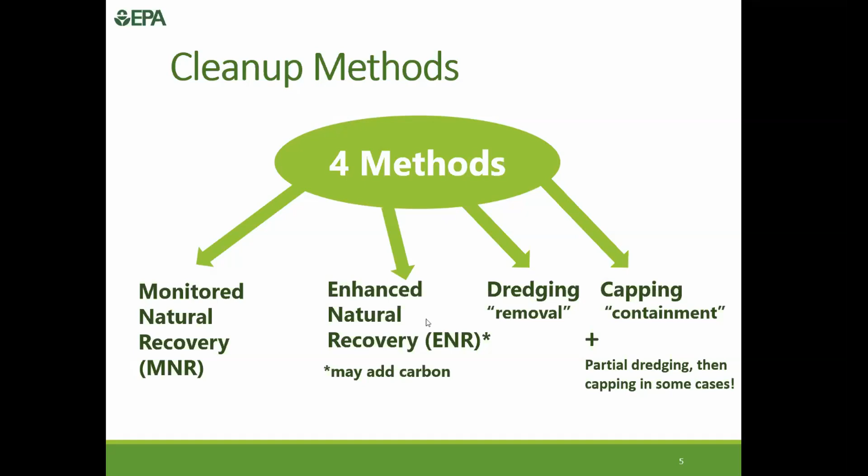So that's what you already knew from earlier slideshows, but there's more in the cleanup plan to understand, like how do you know when to use enhanced natural recovery versus when capping or dredging and capping is required. There are lots of factors that affect this decision, and today we'll go over them.

There's something called the upper limits for enhanced natural recovery—where do they apply, what do they mean? There are remedial action levels, including for benthic organisms, and I want to talk about biological testing and how that fits in. Along the way we'll compare sample results to Table 28 remedial action levels and upper limit enhanced natural recovery limits, and practice with some of the flow charts in the ROD. We'll touch on elements of the cleanup plan that aren't just technical, and at the end look at examples of a completed design. This isn't part of the cleanup plan—it's bonus information, lucky you.

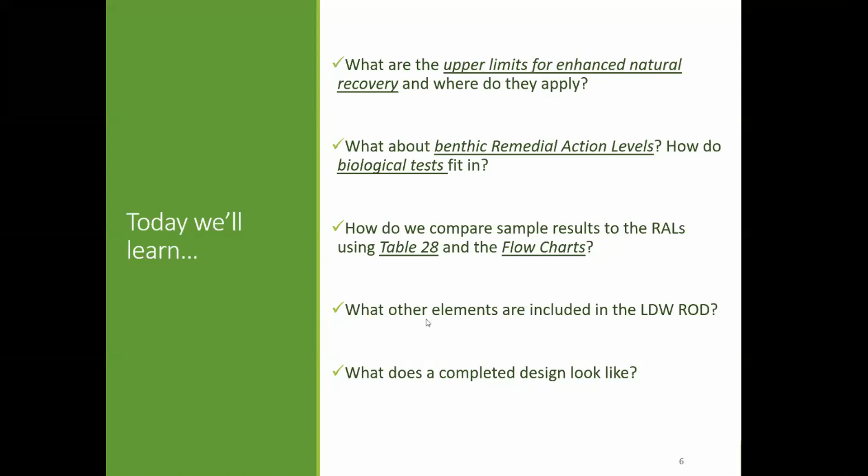So the selected remedy is what we call Chapter 13 of the ROD. It's called the selected remedy because after considering public comments, EPA chooses how to fix, remedy, or remediate the problem. This part of the cleanup plan explains exactly what actions EPA has decided are necessary to meet the long-term goals to protect human health and the environment.

Here are a few key elements. There's a narrative description of the cleanup plan in words, with tables and flow charts that provide action levels and explain what cleanup method will be used. That's the focus of most of today's slides.

It considers the whole waterway, including areas already cleaned up, the navigation channel, early action areas, and habitat restoration areas. Everything needs to fit together with the active uses of the waterway and the function of the river.

It also notes that waterway activities can be restricted in some areas to protect caps, where caps are used. If that's not possible, if we can't protect the cap, it requires dredging or other action.

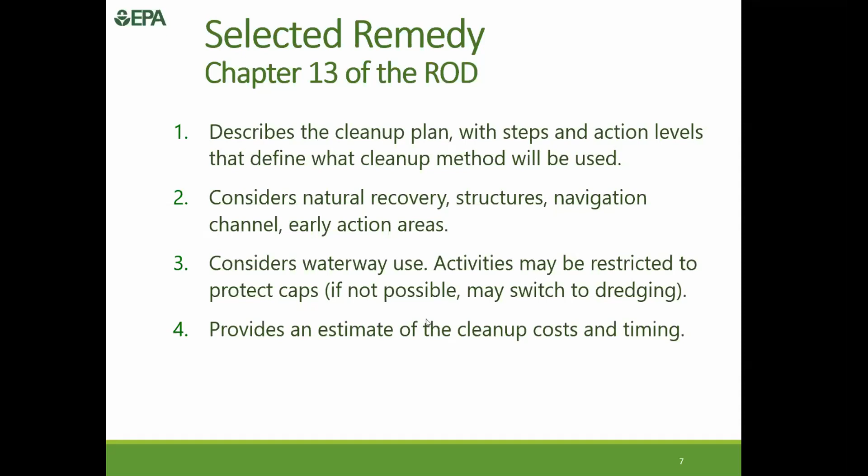Again, the ROD isn't just what cleanup has to happen where, but also a little about how, because we still want to meet the cleanup levels, the long-term goals, after active cleanup. So the plan calls for monitoring to track the progress of natural recovery across the waterway, especially in the natural recovery areas, for at least 10 years after active cleanup, to show the condition of the sediment and changes in seafood contamination levels.

The ROD also recognizes environmental justice concerns. You may have heard this term—the Lower Duwamish Waterway Superfund site affects communities already impacted by air pollution, noise pollution, and other conditions. People who fish in the Duwamish include members of communities with economic, language, or other barriers. We want to ensure communities understand and have meaningful input in the cleanup process. That's why we created the roundtable, and why we're working with community health advocates on institutional controls. For seafood, we are committed to appropriate and effective ways to give people options for eating safer seafood.

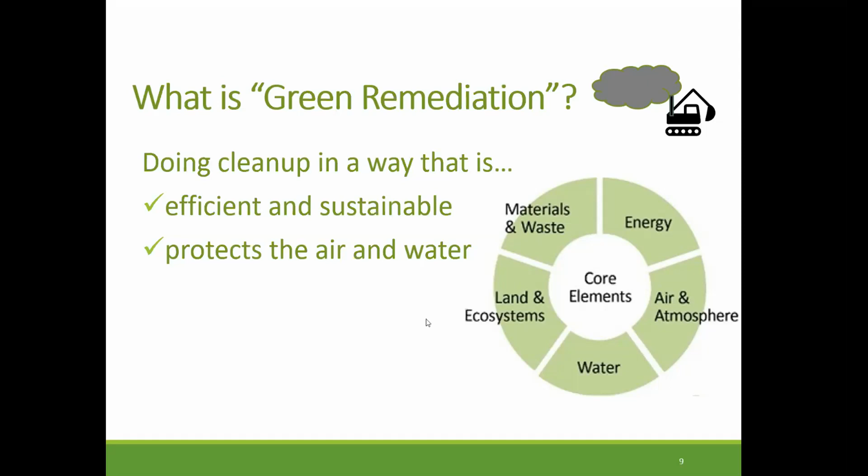But you can't clean up a spot. So how do you define areas that need active cleanup? What areas should we leave alone so that after active cleanup, natural recovery will finish the job and help us meet the cleanup levels for the whole site? The remedial action levels help us focus active cleanup areas. Next slide.

In other areas, dredging, enhanced natural recovery, and capping, these areas are approximate. The samples or individual data used to make figure 18 are in some cases over 10 years old. And this is an active waterway. Conditions have probably changed in some areas thanks to the cleanups that were completed, shown in gray, the natural recovery process, and ongoing control of pollution sources.

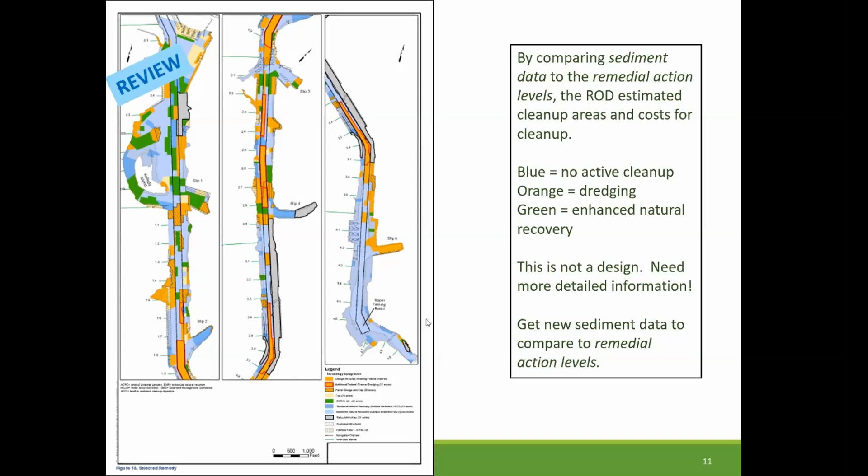The next section is the hardest and longest part. Stay with me. It will all make sense at the end. Next slide.

Last time we looked at this table, table 28 of the record of decision. This is actually just half of table 28. We touched on it in webinar 2, and it's really complicated. But if you understand it, it tells a clear story.

On the top row, see the top green arrow. This says intertidal sediments. The other half is for subtidal sediments. Remember that intertidal sediments are underwater at high tide, but above water when the tide is out. Subtidal is always underwater. We'll focus for now on the intertidal part of the table.

As we learned before, it shows the remedial action levels. We see the white rows that have the yellow boxes that say RAL. Yes, we call them RAL. For each of the contaminants of concern, next to the arrow that says, is active cleanup necessary? So you know by now that if you're above the RAL, active cleanup is necessary.

The upper 4 rows in white are the RALs for contaminants of concern for human health. And the lower 1 row is for benthic organisms and protection of them. I'll talk more about them in a minute. But remember, the RALs in the rows tell us what level of contaminant requires active cleanup. And the columns tell us in what areas or mud depths.

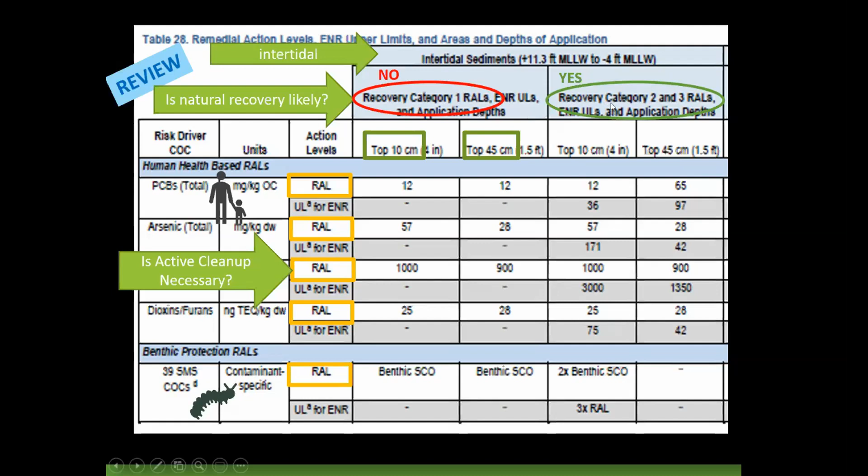So let's look at an example. Let's say you go out and you collect a jar of mud from the beach. It's intertidal, and you take it to the lab, and the lab gives you this table, and the table says there are 20 parts per whatever, we'll say parts per billion, but I'm ignoring units here. 20 parts per something, ppb.

So you take that 20 and you look at table 28, and the remedial action level is 12 in this case, because you know how deep your sample is, where you collected it. 20 is greater than 12. Action is needed. This part was easy. You already knew that. And you then can mark that location as part of the possible cleanup area.

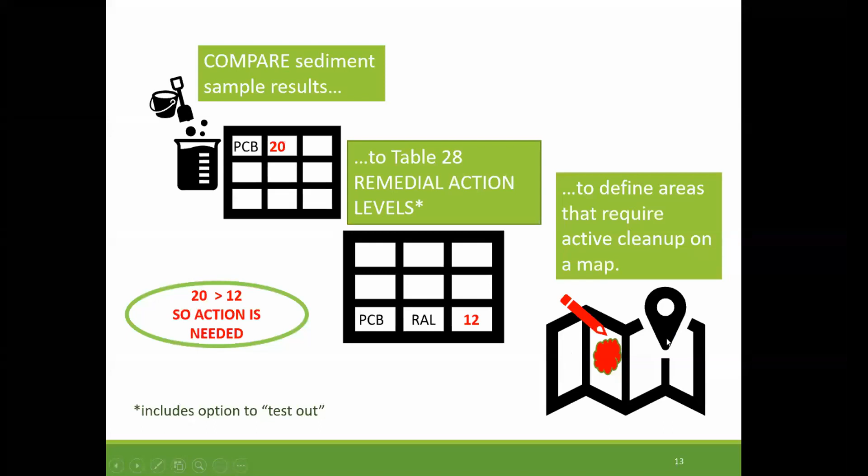Looking at this table once more, PCBs, remedial action level, 12. Check. In this case, it doesn't make a difference if you're under the red oval or the green oval. And it mostly doesn't make a difference if you're looking at 10 centimeters or 45 centimeters. But you will notice 65 is in the last column, and that's because some natural recovery process is expected, so we won't have to clean up as quickly because it will be covered up by cleaner sediments soon.

Which method are we going to use? This is the other part of table 28 that I had to study about myself. There's something called the upper limit for enhanced natural recovery. This is not review. This tells us when we can or can't use enhanced natural recovery.

Enhanced natural recovery has some benefits. It reduces contamination levels in sediments. It uses less clean sand than a cap, and it has less impact on the environment. It doesn't change the depth so much. It's also less expensive. But when should it make sense?

Well, enhanced recovery uses 6 to 9 inches of sand to make healthier sediment. But for areas where Green River sediments won't stay, and there might be erosion, the natural recovery process isn't helping cover the sediments. And deeper sediments may be exposed.

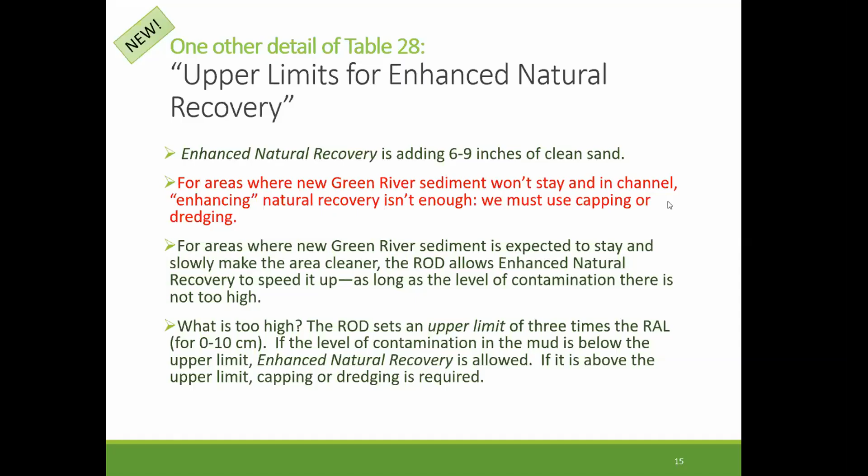Let's take a look. Okay, so the UL for ENR is our special short way of saying upper limit for enhanced natural recovery. And the shaded rows show the ENR upper limit for each contaminant, like the RAL for each location or location type. You see that if natural recovery is not likely, you're in natural recovery area 1, then no, you do not get to have an ENR upper limit. The table shows a hyphen instead of a number.

In the yellow ovals, there are numbers 36 and 97. That is 3 times the RAL of 12 and 1.5 times the RAL of 65. This is because ENR, enhanced natural recovery, is allowed up to those numbers.

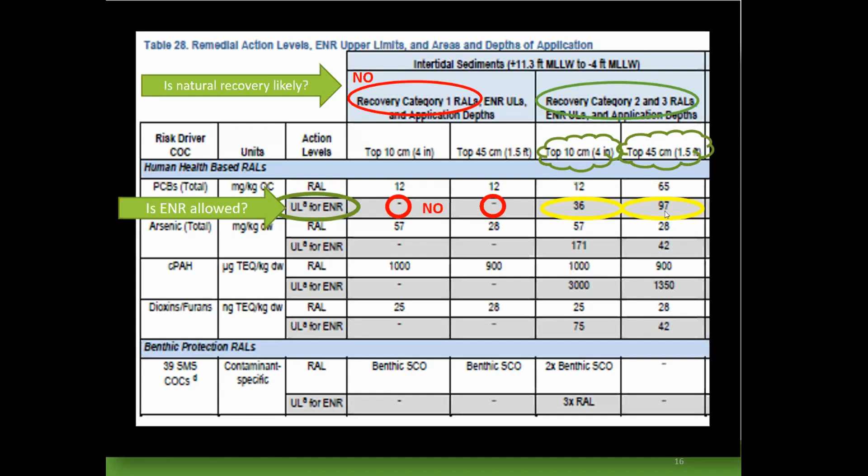Okay, let's go take a sample. So once again, you go out, you're on a beach. This time you know you're in an area likely to recover. You collect your sample. Again, you got 20 as your amount of PCBs, and you compare it to the table. You already are above the remedial action level, but are you above the ENR upper limit of 36? No, you're lower than that. 20 is less than or lower than 36. So you can use ENR in this area.

And so you can mark your map and make a group of areas that get ENR, enhanced natural recovery. Mark your map and let's take another sample.

Okay, so once again, we're sampling, but this time we're in an area not likely to recover. We have the same results, but when we go to the table, there's a hyphen where it says ENR upper limit. So in this case, it's got to be dredging or capping, or partial dredging and then capping, not ENR.

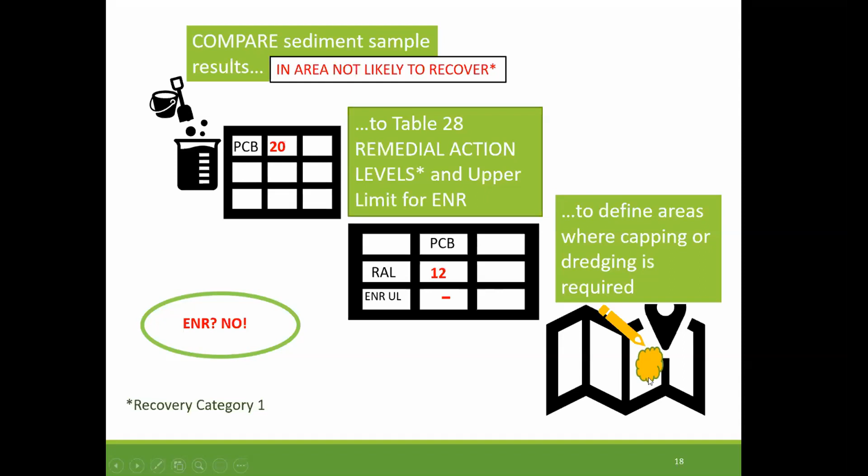So one last one. You're collecting a sample in an area likely to recover. Your result this time is much higher. It's 42. Clearly, you already know it's above the remedial action level of 12. Is it above the enhanced natural recovery upper limit? 42 is greater than 36, so yes, it is. You have to dredge or cap, even though we know Green River sediments will help us over time.

So let's say we take a sample, and I think we're already there. In this case, it's not because it's in a natural recovery category 1 area, but because the level is too high, and so we think action is needed.

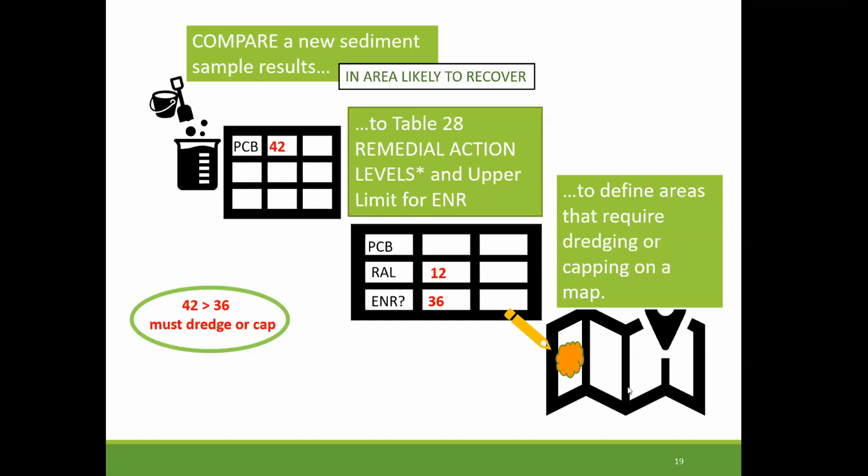Back to table 28. You're going to be so sick of this table. I know I am, but you get to know how to read it. And this shows you, again, the upper limits and how you had sampled results that were higher than that.

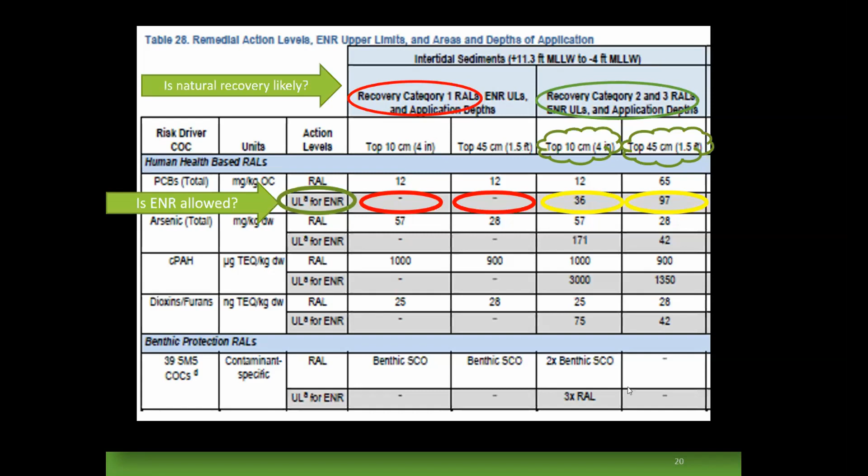I focus a lot on the upper part, the human health contaminants of concern and their remedial action levels. But we also want to protect the organisms that live in the mud, the benthic organisms. They are key parts of the food web.

The contaminants of concern for benthic protection have remedial action levels on the bottom row of Table 28, and they have upper limits for enhanced natural recovery. But wait, you say, there's only one row, and what is benthic SCO? Well, there are 39 chemicals of concern in addition to PCBs and arsenic that are of concern for benthic organisms.

And each chemical has a RAL, a remedial action level for benthic protection. The benthic protection RALs are individually listed in a separate table of the ROD, Table 27. Table 28, our RAL table, refers to the term benthic SCO in the green oval to refer to benthic RALs. Let's talk about the SCO.

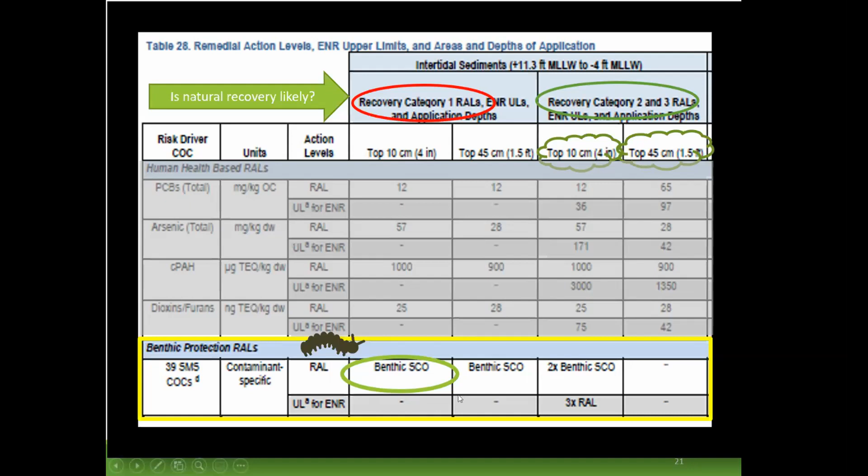Pause for a second here. SCO stands for sediment cleanup objectives, and it's not a term that we invented. It's one of two regulatory levels used in Washington state to protect benthic health.

To develop these levels to protect benthic health, scientists used data from many locations in Puget Sound. For each location, they had data for chemicals in sediment, the population or community of organisms living in the mud, and information about the toxic effects of the sediment in laboratory tests. Based on these data, we understand what chemicals are toxic to the organisms in many locations.

The benthic SCO is the level of a chemical that is associated with no toxic effects. There is another level, not used in the ROD, that has minor effects. Setting chemical levels associated with benthic health allows us to use chemical data when we want to, and that's why we have these numbers in Table 28.

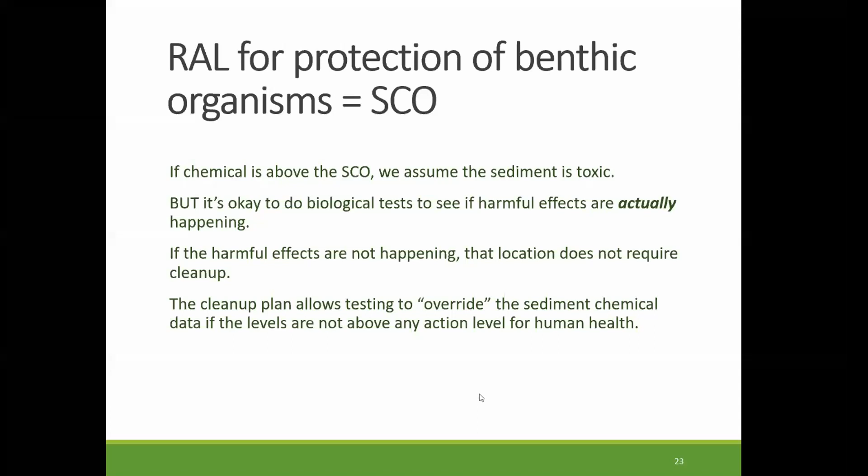What are these biological tests that make sense to use to override the chemistry? Well, laboratories take mud samples and expose certain organisms that live in mud, like worms, baby oysters, and amphipods, to contaminated mud samples. These measure things like how many organisms survived, or how much they grew, or if they grew normally. These tests are specified by state law.

They also use clean mud samples to make sure that the tests are showing what the chemicals are causing, not something else, like how big the particles of mud are. I'm explaining this because during the design of the cleanup, the designers might want to try biological testing in some areas, particularly if the levels of contamination are close to the SCO, or if it could really reduce the amount of cleanup if the sediments are shown not to be toxic.

We're almost done with table 28, but not quite.

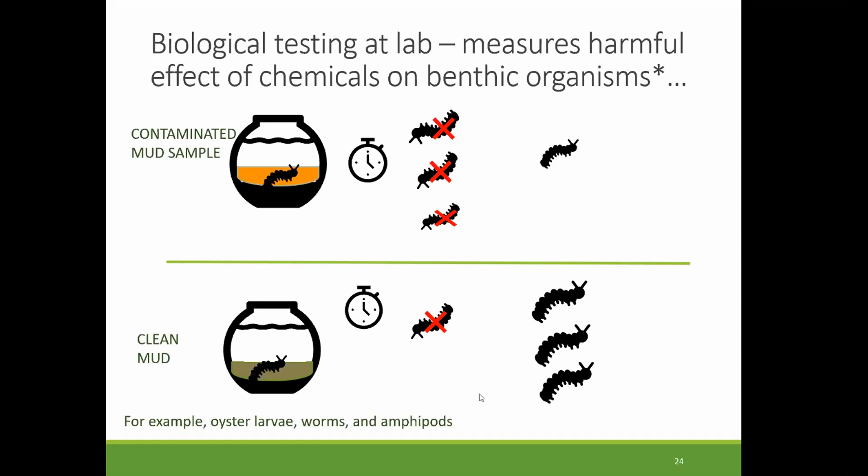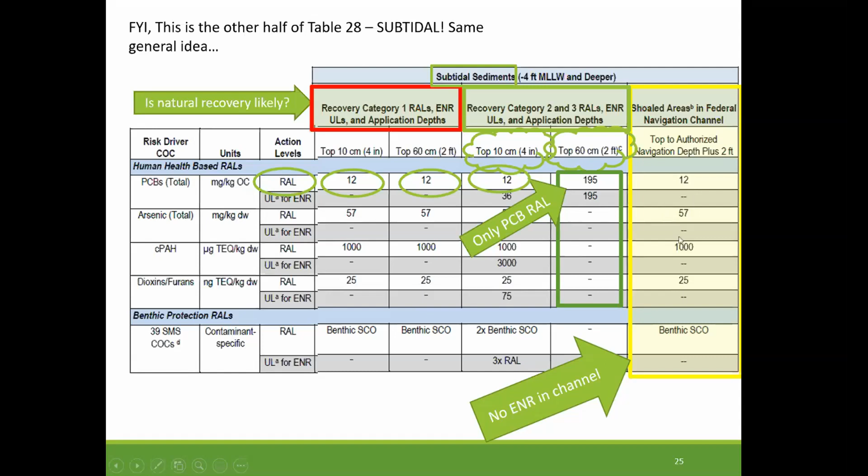All right, let's rest our brains and take a break from table 28.

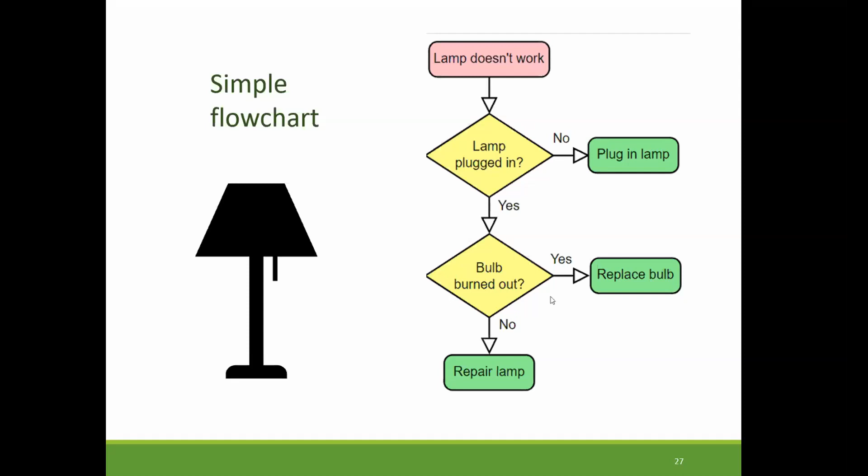Sediment is even more complicated, and sometimes a flow chart is hard to read, but it does make it very clear. So we need to think, what are the questions we would ask to determine when we use natural recovery, enhanced natural recovery, dredging, capping, or a combination of dredging and capping. So the ROD has figure 19 and figure 20, for intertidal and subtidal. These are both flow charts, and figure 20 for subtidal was corrected after the ROD. So we'll go into that a little more. We're going to look at the subtidal flow charts. Next slide.

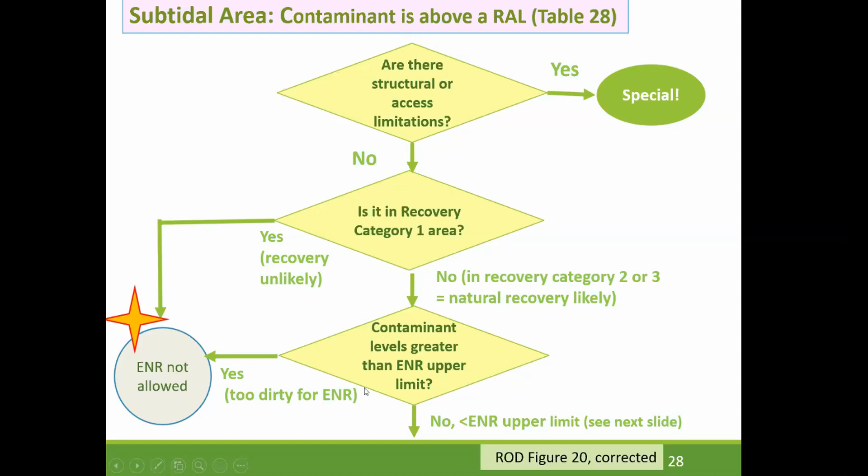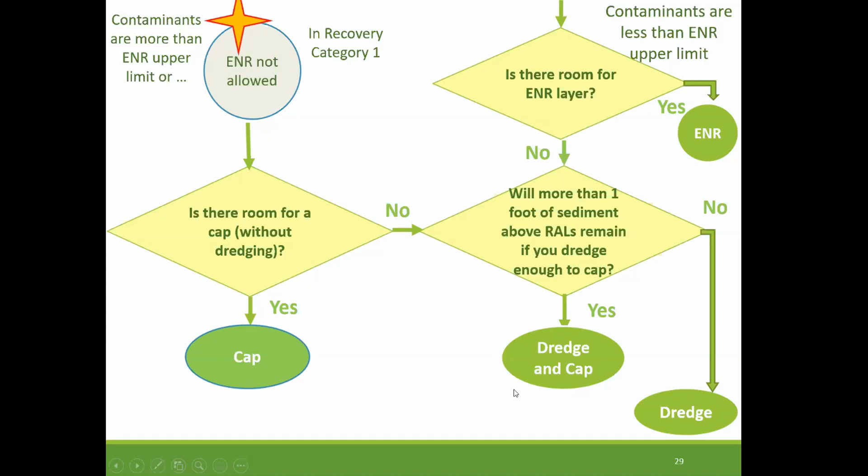So I mentioned structures and access limitations, and that is a question that if you have some problems like that, then the designer, the engineers, have to make a site-specific, case-specific decision. But sometimes, because the ROD doesn't say exactly how the situation will be handled, sometimes you can do dredging under a dock using divers, or you can put material over the contamination instead of dredging, or you can remove a structure, and if you need to, you can replace the structure to do the cleanup. Sometimes there are old wood pilings that aren't being used, and sometimes it's easier to just take them out and do cleanup.

I told you that the other part was the long part, this was the short part. And you now have the ability to understand the flow chart. So the next slides I'm going to cover quickly, but are there questions about the flow chart?

All right, hold on one sec, Ellie. Questions specifically about the flow chart section here. I'm looking at our interpreters. James, any questions about this section? Oh, thanks, from our end I still don't have anybody. Thanks for being there just in case. Fung, any questions from your group at this time? Not at the moment, thank you. Carla, any questions at this time? No? Okay, all good. All right, Ellie, no questions on this section. Let's keep rolling, let's roll.

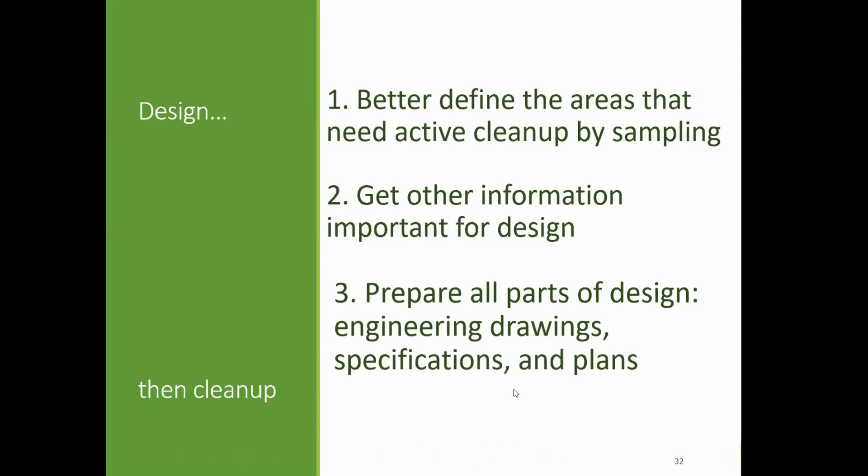This is a slide that sort of says what things we might need to know to design the cleanup other than just RALs and upper limit ENRs. If dredging is required in an area, how deep is dredging going to be needed to make sure that after dredging, we meet our remedial action levels? Will dredging 3 or 4 feet remove all the contamination? If there is deeper contamination, remember a cap may be needed after dredging.

What conditions do the designers need to consider? Currents from the river might erode in some areas, whatever you put down. Are there sources of groundwater that will push contamination upward through the cap? And what about biological disturbances? What about human disturbances? Is the area close to structures? Is it next to an early action area? So the completed early action needs to match up with the new sediment cleanup in other adjacent areas. What about habitat restoration sites? How do we match up the edges? And what about boats? Is this area in a place where boats are kept for storage, or where navigation is needed, and so there's already some need to have depth of water? So those are some questions.

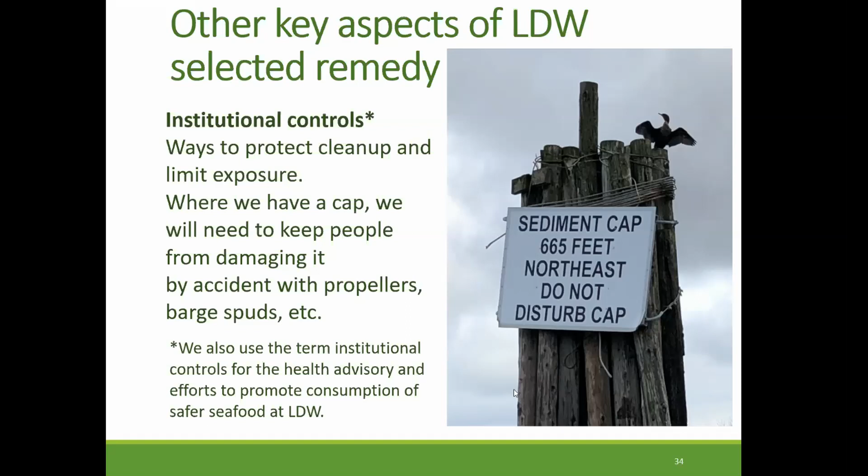Whatever we do, it has to comply with requirements of other environmental laws and laws like worker safety, speed limits, protection of cultural and historical resources, endangered species, water quality protection, and navigation channel requirements. So the design will include plans for meeting all of these requirements.

What does a final design look like? I'll show you some examples that were prepared for the design of Terminal 117, where a cleanup was completed by the Port of Seattle in the waterway part.

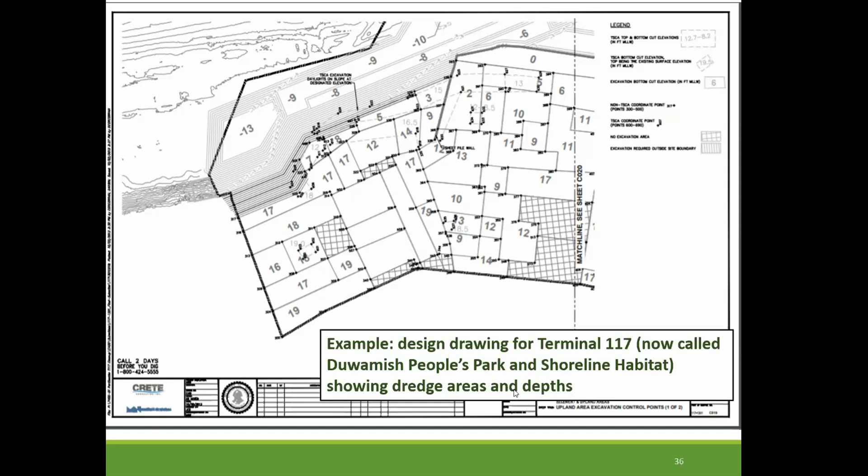This is an early action. This is an example of an engineering drawing, and it shows the depth of excavation on land in the middle, and outside of that, the slope into the waterway. It shows how deep the dredging had to go in the waterway and what the final slopes had to look like. It also talks about soil, but we won't have soil excavation for Lower Duwamish Waterway cleanup.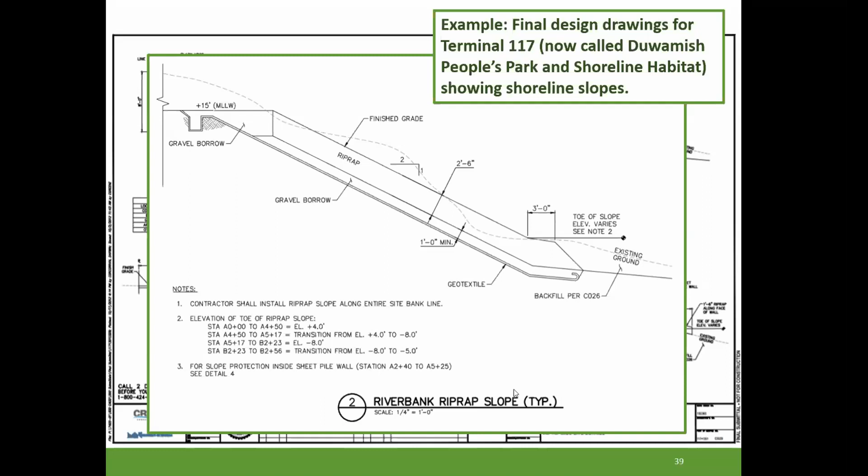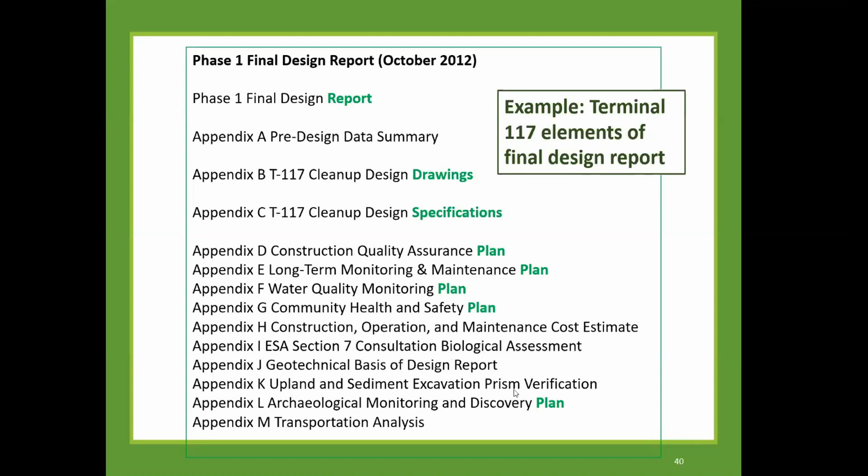This is the last slide. I know you're crushed. There is less pollution coming into the river now than there used to be, thanks to environmental laws. But during design, EPA will be coordinating with the Department of Ecology, the lead agency for pollution source control. We all want to make sure ongoing pollution sources like stormwater, which can carry pollution from roofs, streets, and paved areas, will not cause sediments to become contaminated again and require cleanup because it's above action levels.

We also know that the contaminated sediment itself moves around in the waterway when the tide goes in and out, and when the river flows or boats erode the bottom. So for us, cleanup of the contaminated sediments as soon as we can is an important part of reducing pollution in the water and sediments of the Lower Duwamish Waterway.

So next slide, please. If you have questions about that, let me know.

Thanks, Ellie. We had a question in the chat and answer in the chat, but I think it's worth repeating so that everyone can hear it. So Adrian's question from Adrian from the DRCC: how do we know if a cap becomes disturbed if it is underwater and we can't see it? And then James from DRCC suggested that we find out through testing every 5 years.